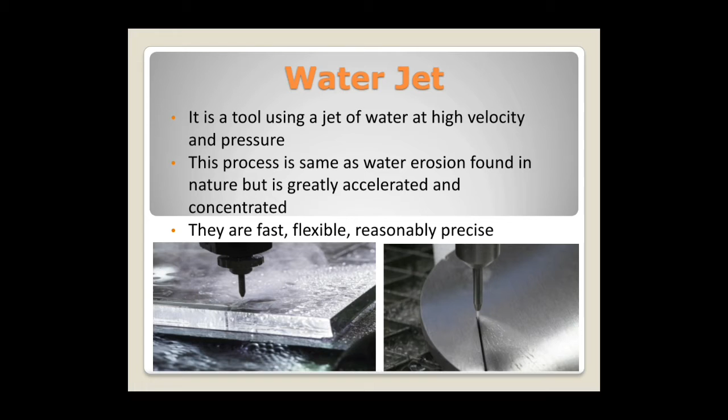So, moving on to the next slide, how water jet works. High pressure, when bombarded on the workpiece, erodes the material. A high velocity water jet is directed at a particular target in such a way that its velocity is virtually reduced to zero on striking the surface, due to which the water jet will create a hole in the material if the pressure is high enough.

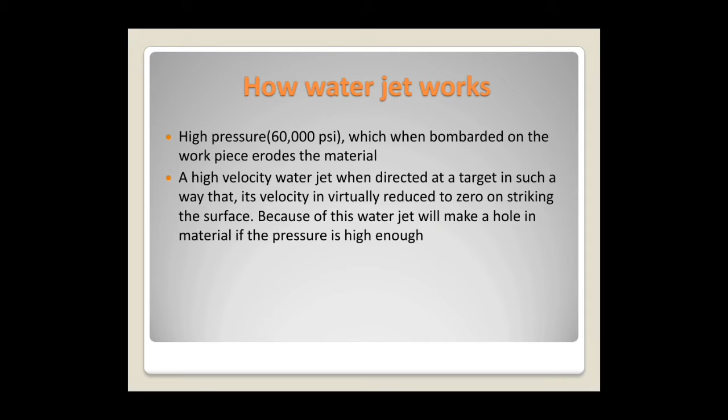So, there are different types of water jet. The two prominent are: first, pure water jet; second, abrasive water jet. From the slide, we can see the two diagrams. Pure water jet is quite simple and involves inlet water as well as jewel orifice. While in case of abrasive water jet, we will find the process to be complex and containing many parts.

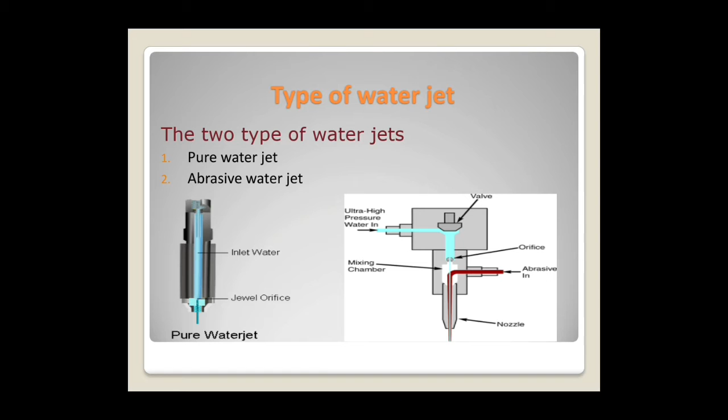Now, pure water jet cutting, consisting of various parts such as water under pressure, water nozzle, pure water jet, workpiece, as well as cut width. We see from the figure that water under pressure is provided so that the water jet has a high velocity. Also, the workpiece is selected according to our needs, and the cut width is also as per our requirements.

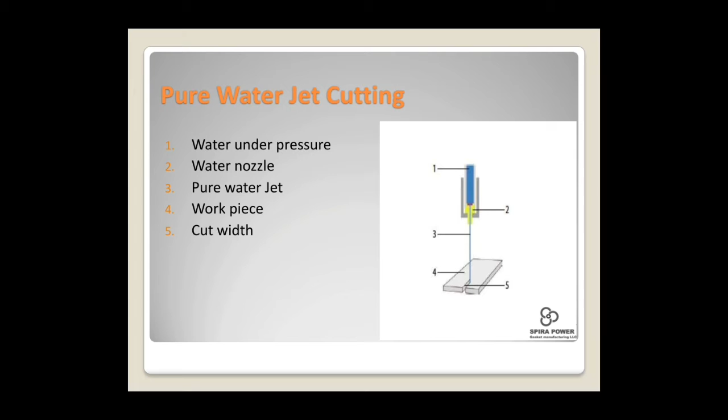Now, in abrasive water jets, we find the process consisting of various parts. First, water under pressure. Second, water nozzle. Third, water jet. Fourth, abrasive feed. Fifth, mixing chamber. Sixth, abrasive nozzle. Seventh, water jet with abrasive.

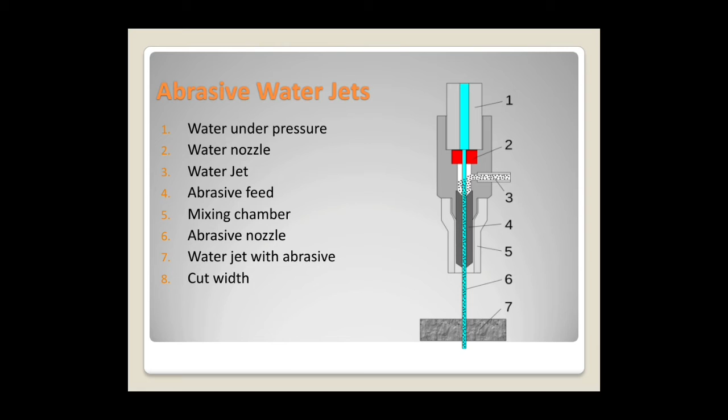And eighth, cut width. So, we find initially the process similar to the pure water jet, but the contrasting difference between both of them is the mixing chamber. Here, various materials are fed into it so that we get the cut width to be more precise later on. So, it has a high application and is used in various processes, especially in industries.

Now, moving on to the application part, it is basically used for paint removal, for cleaning, for cutting soft materials, then cutting frozen meat. Later, it's also used in the textile as well as leather industry. Now, we know that these two industries are key to success for a nation. This technology has a weight to carry on.

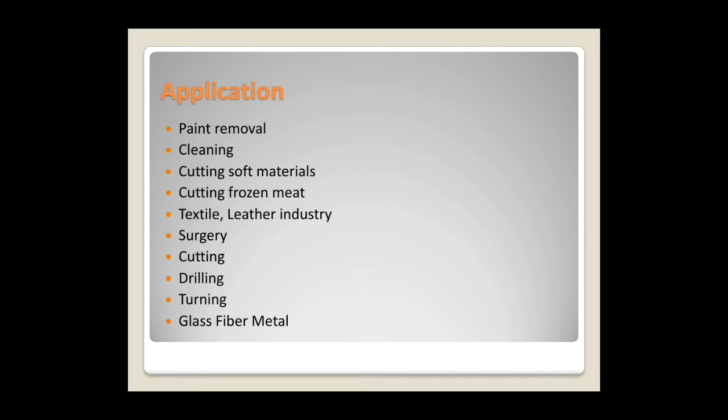Then, it's also used in surgery, then cutting, drilling, turning, as well as in glass fiber metal. We find glass fiber used in various processes. So the whole water jet process is used to create holes as per requirements, and it can be used for thermosetting as well as to create various other needs.

Now, moving on to the advantages of water jet cutting. First, there are no heat affected zones. Second, ability to manufacture burr free parts. Then near net shape cutting. Next point, can cut through thick materials. Next, it's cheaper than other processes.

That's a good thing. Next, it can cut through any material. Then get nice edge quality as compared with different materials. Last but not the least, it leaves a smooth finish, therefore reducing secondary operations.

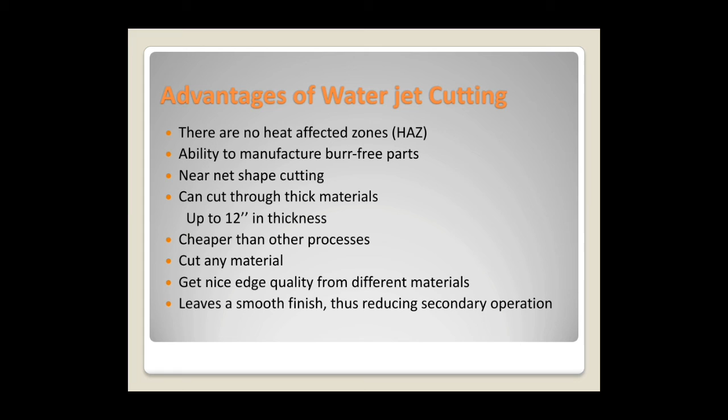Now, some points on disadvantages attached with water jet cutting. First, a limited number of materials can be cut economically. While it's possible to cut tool steels and other hard materials, the cutting rate has to be greatly reduced. Second, very thick parts cannot be cut with water jet cutting while still holding dimensional accuracy.

Third, taper is also a problem with water jet cutting in very thick materials. Taper is when the jet exits the part at a different angle than it entered the part, and can lead to dimensional inaccuracy. So we find water jet overall productive, useful, and cheaply available.